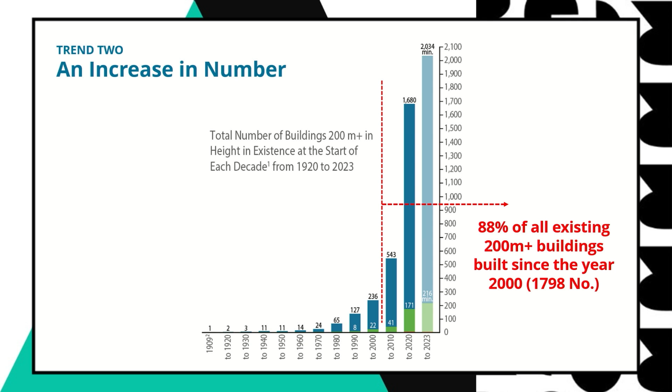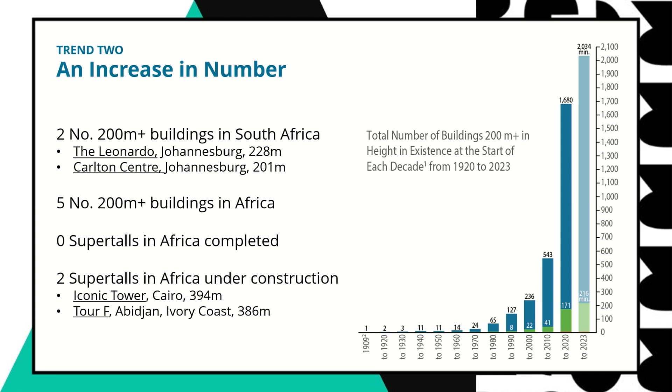Okay, so trend number 2, there's a lot more tall buildings. I just want to put Africa in that context. At the end of this year, there will be more than 2,000 buildings around the world 200 meters or greater. Africa has 5. South Africa has 2 of those 2,000 buildings. The whole of continental Africa has only 5, has no super talls, but 2 are under construction, about to complete—Cairo's Iconic Tower and Ivory Coast's Tour F will be the first 2 super tall buildings on the continent of Africa.

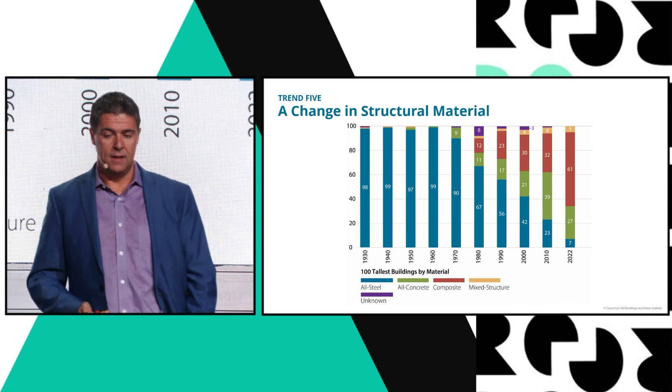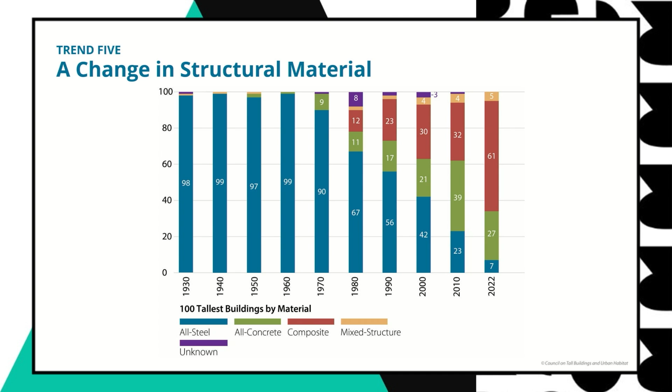Structural material, for the engineers in the audience—well, for all of us. In 1970, 90% of these buildings were built out of all steel. Now 7%. There's been a huge shift towards concrete and composite construction, steel and concrete acting together, which has major implications for the building industry and the carbon scenario, which I'm going to get onto. So if you predicted the world's tallest building 30, 40 years ago, you'd have said 3 things with certainty: it'll be in the USA, it'll be an all-office building, and it'll be built out of steel. The exact opposite of those 3 statements is now true.

It'll be in Asia—another 10, 20 years, I'd say it'll be in Africa.

It'll be a mixed-use building, built out of composite construction, and maybe in 20, 30 years' time I'd be saying it'll be built out of mass timber. I'm going to get on to mass timber in a minute.

Trend number 6: the motivation behind these buildings has completely shifted for a lot of them. 30, 40, 50 years ago, these buildings were being built by corporations who wanted to get all their employees in one address and get free branding by calling themselves the Singer Building, the Woolworth Building, Chrysler, Sears, Petronas. Those were the names of the tallest buildings in the world.

The scale of this has now shifted. It's not only about corporations anymore. Now cities are using tall buildings to brand themselves in a competitive global market for business, commerce and tourism, in the same way car companies did it in 1920s America, at the tallest, most iconic end. So now these projects are more likely to be called Taipei 101, Burj Dubai as it was originally envisaged, Mecca Clock Tower, Shanghai Tower, Jeddah Tower.

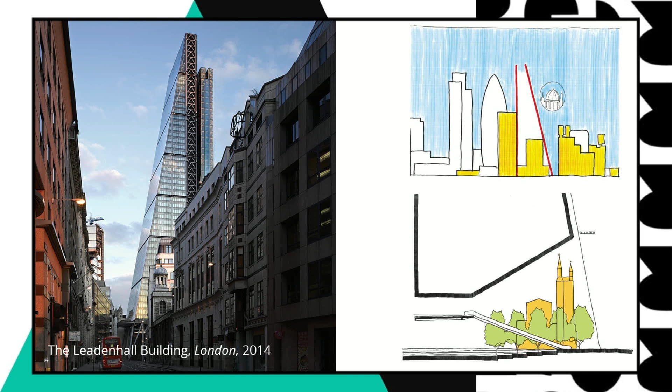This is Richard Rogers' cheese grater in the center of London. It wasn't designed as a cheese grater—that would be atrocious, well, let's design a cheese grater. It leans in and opens up at the base because of particular viewing corridors of St. Paul's Dome and this Grade 2 listed church at the base.

The idea I'm trying to get across here is when you put a tall building, any building, in a city, the city already has a presence which should impact the design—not a developer saying my brief is to make the most money, or my brief is to create a piece of sculpture that stands out. So buildings should be inspired by the physicality of the existing city.

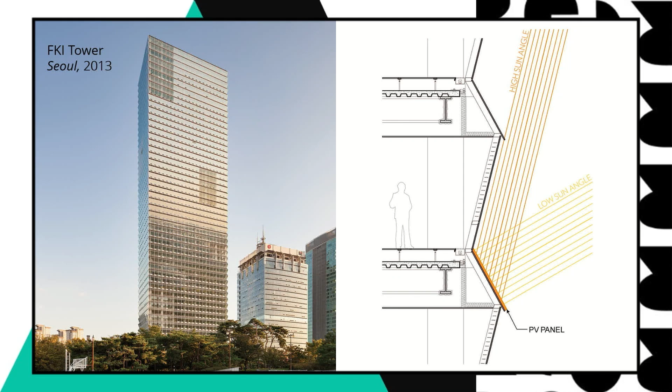Here's an extreme example of that. Remember, I'm not saying all these projects are great in every way, just getting an idea across. This is an extreme example of a building that exists because of the physicality of the city. I said physically, environmentally, and culturally—environmentally, which you're all interested in as part of the Green Building Council South Africa.

Environmentally, how do you do that in a tall building? This is an all-glass skin tall building, which I don't necessarily agree with, but part of it is solar panels. In this diagram, the solar panels are arranged within the spandrel panel so they not only capture solar energy, but the angle blocks out more sun at high angle in summer and lets more low-angle sun in during winter, for more passive gain—something environmentally.

Wind turbines—15 years ago everybody got excited about wind turbines, every tall building was going to have them. There are only 4 tall buildings in the entire world that have wind turbines on them, because it turned out they created a hell of a lot of problems and didn't even generate enough energy to offset the carbon of the turbines themselves. But the science behind it was absolutely sound.

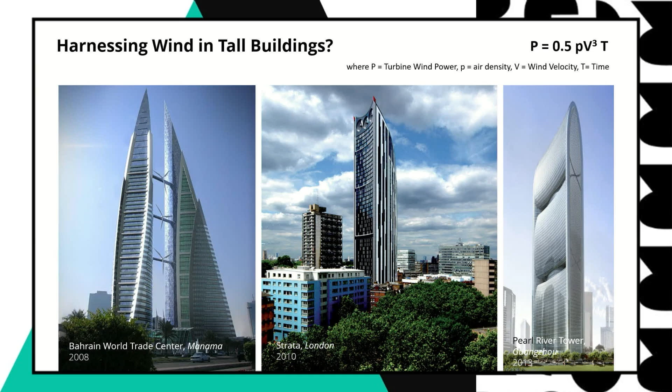I'm not going to talk a lot about science, but you see that diagram? The power coming out of a turbine is to the cube of the wind speed going in. So you double the wind speed and you increase the power coming out by a factor of 8. So the science behind it was sound.

But unfortunately, it hasn't happened—partly because these wind turbines are kind of Mickey Mouse, really. They're applied onto the building; they're not an integral part of the building.

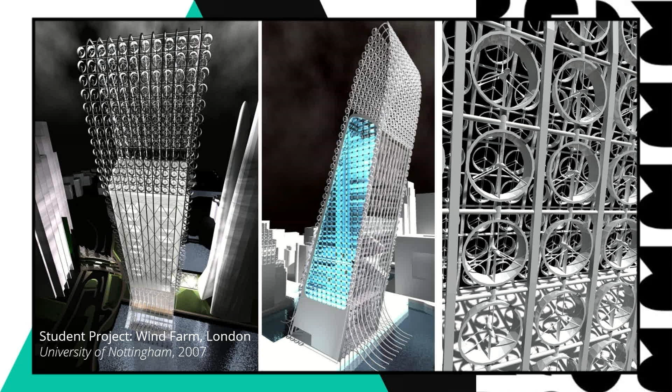I think this is the only student project I'm going to show you, but it always makes me laugh a little bit about rainwater recycling.

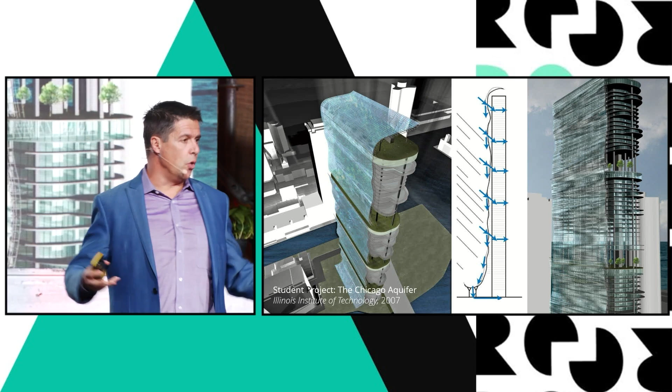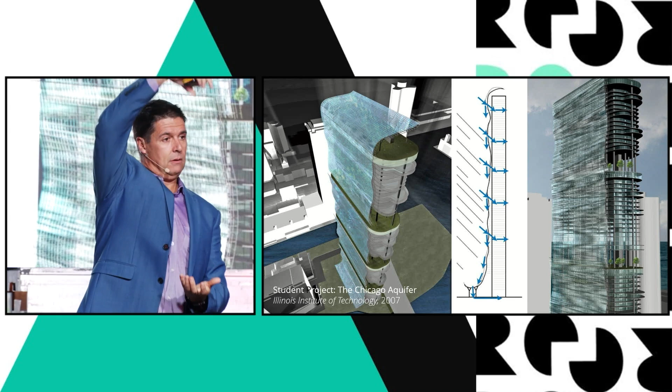All accreditation systems give points for rainwater recycling. In the context of a tall building, that's usually the roof of the building, might be the roof of the podium as well. But think about a tall building - the roof is a negligible area. And actually, rain doesn't fall like that, especially at height, it falls like that. So if you're serious about recycling rainwater, it's all about the facade, really. It's not about the roof.

I said physically, environmentally, culturally. How can a tall building reflect its culture? Well, here is a very literal way. In Shanghai, Taipei, and Korea, all variations on the Chinese pagoda. This is what I call literal cultural symbolism, taking an element from culture and making it literal. I think it's a step in the right direction.

If you picked Jin Mao Tower up and put it in the middle of Johannesburg, everyone would be like, why is that Chinese tower in the middle of Johannesburg? So at least it's a step in the right direction. I don't know it's the way forward, though.

Here is another literal cultural symbolism - Zaha Hadid architects, Chinese mountains, you know, evocative forms.

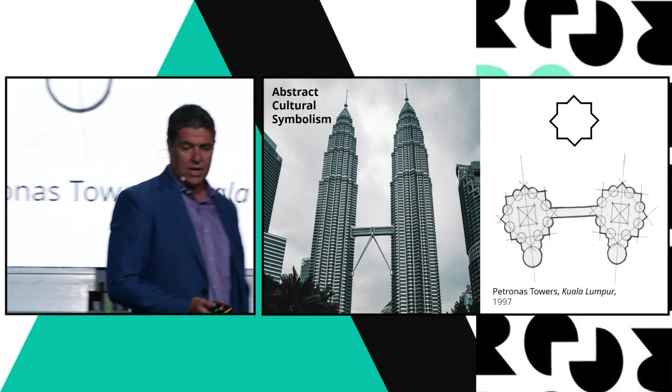I love this project on many levels, Petronas Towers. But if you hear Cesar Pelli talk about this tower when he designed it, he believed it was a Malaysian tower because the plan form of the building was inspired by the Islamic star, which you can see there. But was that enough? I mean, does anyone ever read a building in plan? It was then extruded through 88 stories of modern steel and glass.

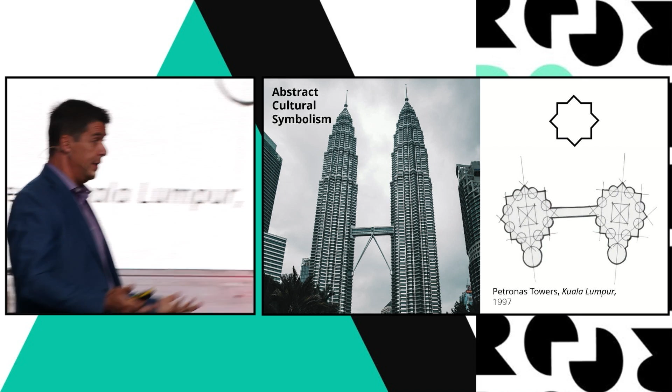I would argue if you put that building in Johannesburg, it would have been seen as a South African building. Also, don't make the mistake of thinking because a building becomes synonymous with a place - meaning Eiffel Tower, Paris - doesn't necessarily mean that it was inspired by the local culture to begin with.

So there's a project about 2 miles from Petronas Towers, which is the same plan form, a Malaysian architect, but it's not just a 2-dimensional game. The brise soleil, the modern jali screen is brought up into the 3rd dimension, and creates the brise soleil for the curtain wall that sits behind it. And this tradition of Islamic screening has been carried forward into many tall buildings. It's a way of maybe capturing the culture of the building.

Okay, these design principles are not all as long as design principle 1, so don't get worried. Okay, design principle number 2: tall buildings should vary with height. They should not just be vertical extrusions of an efficient floor plan.

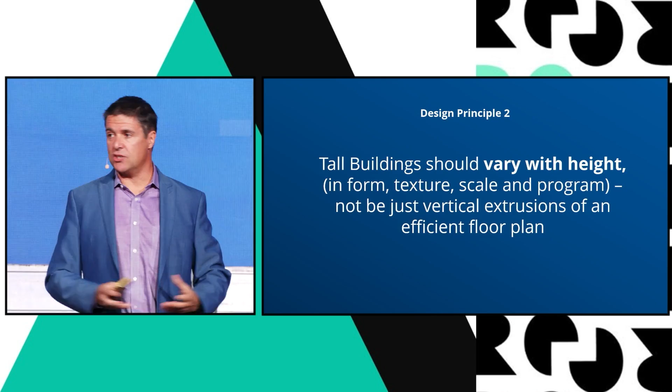I talked about the Seagram building, just this extruded floor plan - they should vary with height. Bjarke Ingels with the court scraper, as he calls it, in Manhattan. Project in Toronto, Bangkok, all real projects. They're not just this extrusion, they've got something else going on.

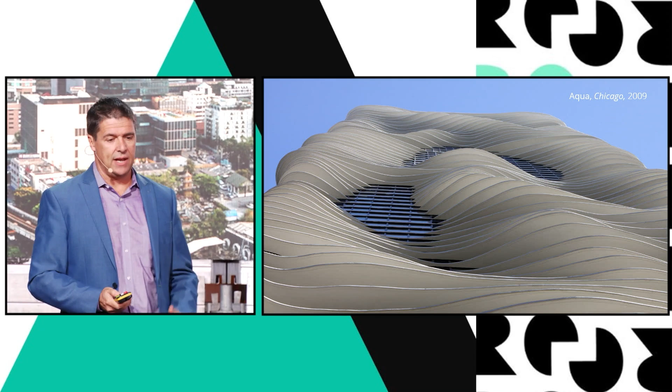Aqua Tower, Jeanne Gang, tallest building designed by a woman in Chicago. The key point I'm trying to get across here, we need to think about tall buildings in terms of horizons and strata, not just one big extruded thing.

The difference between a tall building and a small building is as the building rises up in the city, it potentially opens up a relationship far and wide in the city in the way that a small building can't do - a visual relationship, an environmental relationship with breezes and wind and sun. So that should become the generator of design.

Here's a simple way to demonstrate that - project in Vancouver, Bjarke Ingels Group again. At the base, he had to deal with this busy road. The busy road wasn't there at level 60, so it did something else - it morphed. He was designing horizons.

And this is just mind-blowing - if you've fallen asleep, just wake up for this one. I love this one. Okay, the Burj Khalifa - the external air temperature at the top of the building could be 8 degrees cooler on any given day. The amount of particulate in the air, sand, completely different. The amount of moisture in the air, completely different. Here's what I'm saying: the climate is completely different.

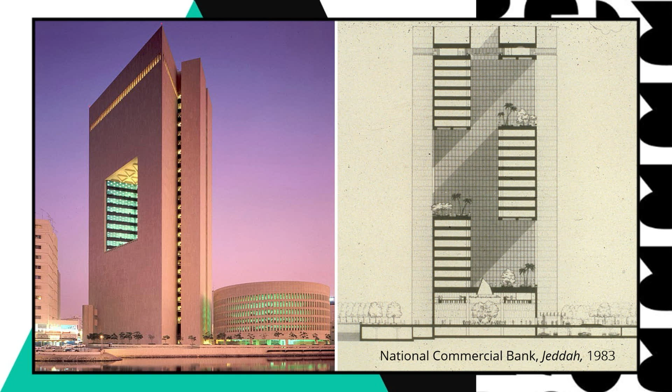Here's a project in the middle of the Middle Eastern desert by SOM, where the glass was inverted on the inside through these sky gardens that step up. And the building, you might not like it. I'm not even sure I like it. But it feels like an extrusion of the desert with the materiality.

There are several buildings in the Middle East that do that, rather than exposing to the sun with all glass. Not just the Middle East, it's a fantastic project in Mexico City that does the same thing. Shields on the south side with intense solar gain, does something different where it opens up on the north side. I know it's the same here, but different here. If we moved away from this fascination with all glass, we just have an opportunity for expression that's far greater.

Okay, tall buildings should maximize layers of usage on all systems and materials. Here's a project that won our Innovation Award a few years ago. It's all glass, so not great, but it has what's called a bioskin on the outside.

Now, all-glass buildings typically have solar shades on the outside. Ridiculous. Why did you do that? You didn't need to do that. You didn't need to build it out of all glass and then waste more carbon to cover up the glass. You didn't need to do that, did you?

But this project, the bioskin is a continual ceramic pipe. So the water that falls on the roof and the nearby park is all pumped up, circulated through the ceramic pipe. When the sun hits it, the water evaporates through the porous ceramic pipe. In doing that, it sucks heat energy out of the atmosphere.

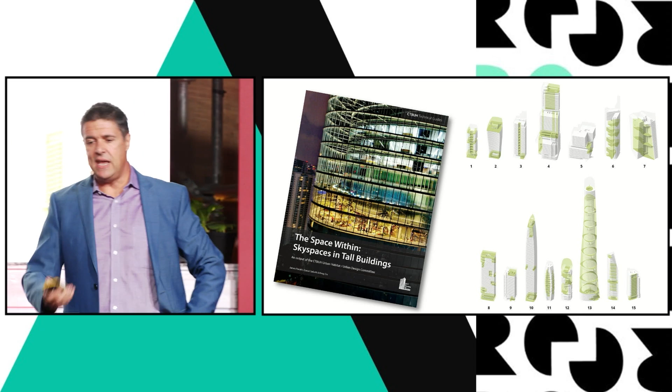The granddaddy of them all is the Commerzbank by Norman Foster in Frankfurt. Every single office worker has access to a sky garden that steps up, you can see them there.

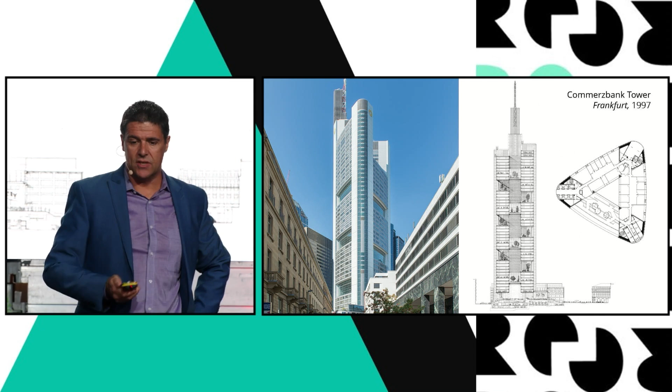Around this triangular plan, there's a project in Turkey, in Istanbul, which surprised me because when I went there and saw it, it looks like just another glass office building. It's not—it's actually residential. And the front garden, every unit has this front garden, shrunk back from the skin.

Then perhaps the most extreme example is the second tallest building in the world, Shanghai Tower, where the entire height of that 632 meters is wrapped in 18 sky gardens. Communal space—essential.

Mass timber. I don't know what the mass timber movement is like here in South Africa, but I believe it's an absolute game changer for the building industry. Up to this point, the most sustainable building in the world is one that doesn't have to be built—that's helpful, isn't it? Mass timber changes that, because steel and concrete takes so much energy to create.

So think about mass timber. Instead of using all that energy to create steel and concrete, the tree is happily producing itself without any of our help, producing itself as a building material. But it's better than that, because while it's producing itself, it's sequestering carbon out of the atmosphere—sucking that carbon out. 50% of the tree is carbon.

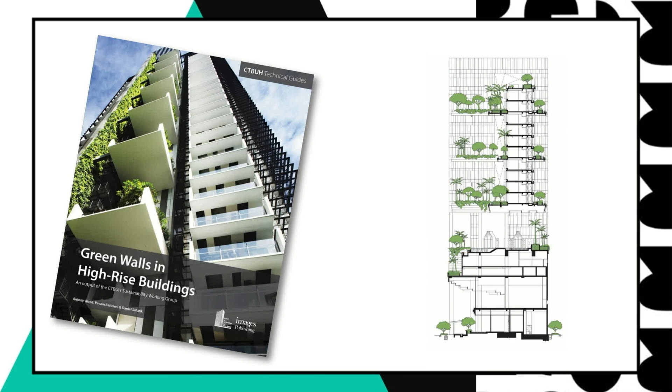Again, we produced a guide that looked at about 15 projects in detail. A large part of them are in Singapore. If you stand still long enough, Singapore's blessed with climate, you're probably going to grow vegetation. But it's not just Singapore, you know.

In temperate climates, the vegetation is thick in the summer where you might want to block some of that solar gain, thins out in the autumn and winter and lets some of that solar gain in.

There's a project in Cyprus. This is fucking exciting, yeah? Look at that building. This is a piece of architecture that speaks to the age in which we live, not these shit glass towers that we're throwing up everywhere. This is beautiful architecture, but it's an architecture of our age that speaks to the challenges that we have.

Vegetation in buildings is a great thing, but it can go further. Not just vegetation, vegetables. This is a project in Tokyo that is literally fruit and vegetables grown on the skin of the building and throughout the building. It's an office building, harvested, used in the canteen.

And I said that it's not good to build a building out of all glass. I'm not sure it makes much sense to build it out of 2 skins of glass. By the way, there's a project, double skin facade, in Berlin that you can lie down in. That double skin facade of unused space is 6 feet wide. I don't know that that makes sense. But if it does make sense from an environmental viewpoint, tempering the inside and outside environment, natural ventilation, then use it.

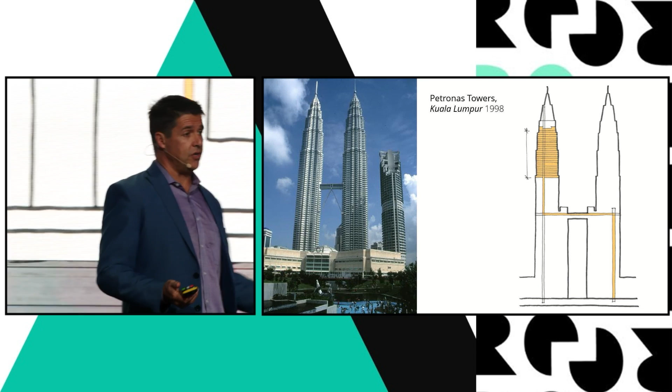Actually, Petronas Towers, the skybridge is part of the fire evacuation. Think 9/11, yeah? Think about all those people trapped in that building that could not get out. Think about the advantages of being able to move horizontally. This saved 1 fire stair in each of those towers. 1 fire stair per floor times 42 stories times 2 towers. There's a hell of a lot of money - probably finance the sky bridge.

But it's more than just bridges. It's more than just circulation bridges. This is 6 or 7 social high-rise towers built in Singapore, linked at 3 levels, with significant urban habitat in the sky. Not just bridge - urban habitat.

That brings me to this. The roof plane of a tall building is the most valuable space there is. So the highest level, best views, cleanest environment externally. You can plant it. It's outdoor space at height in a tall building. And what do we do in 99% of tall building roofs? We fill it up with crap. We put the lift overrun, satellite dishes, water tanks. Why do we do that?

We should use the roof of the tall building. Still has the lift overrun rooms, but you can use the space. Maybe you can do more than just put some planting in between the lift overruns. And if you take the idea of the roof and the sky bridge and link it together, then you get this, which is just phenomenal to sit in this urban plane at the 50th level. These are all real projects I'm showing you.

This is incredible, this project in Singapore. Look down on it. What have they done here? They've managed to put 3,000 people living on a plot of land and recreate the original green area of the site 3 times in the sky. That's what we should be doing with cities, isn't it?

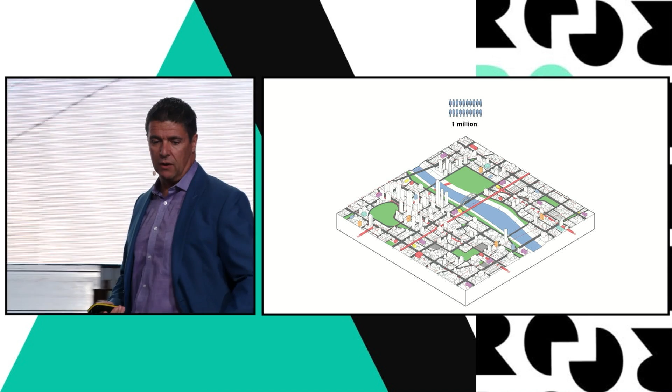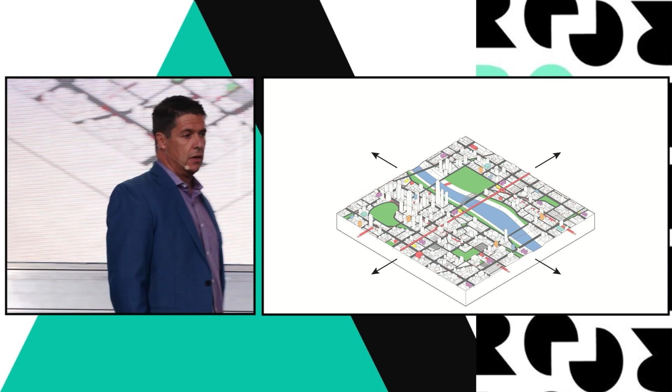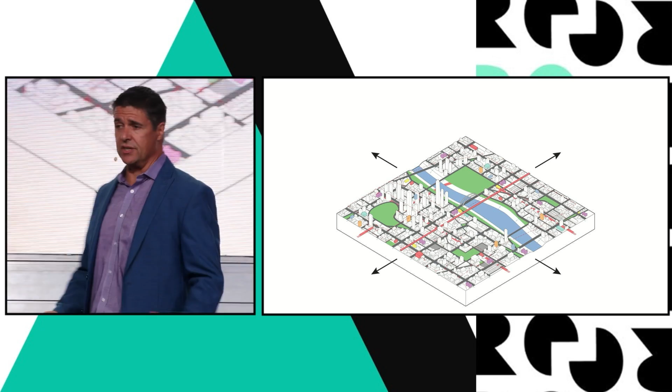That city's going from 1 million to 10 million people in the next 20 years. That is not science fiction, that is happening all around the world. Where do those 9 million people go? They can't go in the ever-expanding horizontal city. It doesn't make sense sustainability-wise. The land use, the energy to create and operate that city just doesn't stack up against this backdrop of 1 million people urbanizing on the planet every week.

So there we go. Beautiful? No. No, because every white box there is office, residential, or hotel. That's not a city.

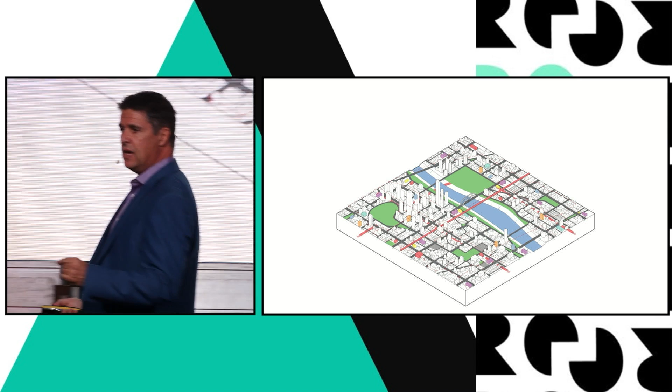So we need to think about the tall building as that 2D infrastructure-rich ground plane flipped vertically, with the infrastructure, with the parks, with the sky gardens, with the green, with the 10 principles I just talked to you about, and then linked together, perhaps with sky bridges. This is what I talk about with my students as sustainable vertical urbanism. I'm not saying this is going to happen in Cape Town, or in established cities, but there are a lot of cities growing with these millions of people. Maybe this is a way forward.

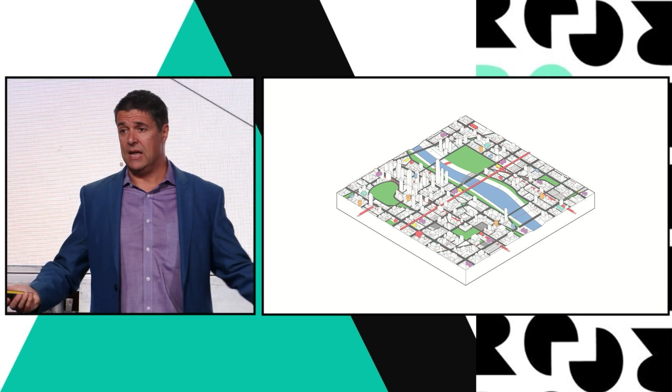I always get asked this, so I'll finish by saying this: who pays for it? Nice idea, Antony, professor in an ivory tower. Okay, who pays for all that? The government, out of taxes. Who pays for the infrastructure right now? The owner developer doesn't, the architect doesn't. The government does, out of taxes. Well, we just add 9 million more taxpayers. So these buildings need to become public-private partnerships, where the government, out of taxes, is paying for the park or whatever, in the same way they would at the ground floor. That would really help in terms of increasing the whole agenda of this connected three-dimensional vertical urbanism.

I wanted to take one minute to tell you about my organization, the Council on Tall Buildings and Urban Habitat. Founded in 1969, we have more than 2 million people plugged into our network around the whole world. It's multidisciplinary: 26% of our member base is owner, developer, funder, followed by engineering, architecture, construction, materials, and government. Everybody involved in the creation of cities and tall buildings is part of our network.